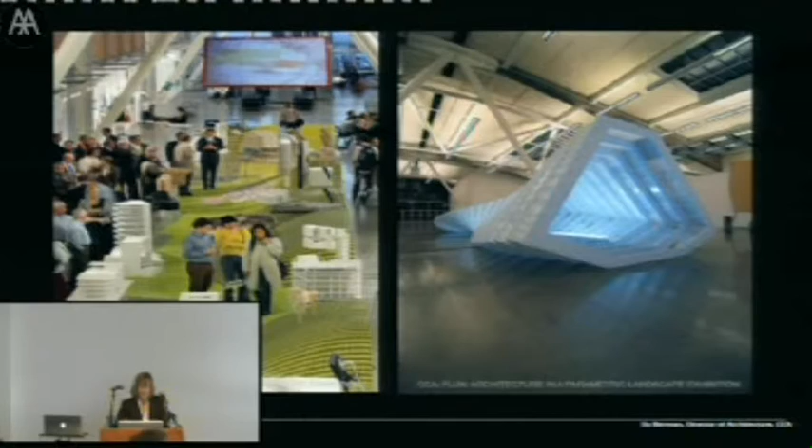Given the topic of this conference, I'm going to present a sampling of CCA architecture that shows an overview of work in the realm of digital design technologies and related practices that cuts across our research and design labs and their workshops, our lectures, exhibitions, and installations, our digital media coursework embedded within our professional and post-professional curricula, and also related CCA faculty, research, and design.

In many ways, this reflects my own attitude about both the curation of research and innovation within the realm of academia, especially within the context of professional schools of architecture, and the multiple intersecting networks through which it might be developed.

Architecture within the academic environment has always embodied a double-sided agenda, defined on one side by the need to produce a generation of practitioners who will become professionally competent as architects, and on the other side, the objectives of the academy, whose role it is to produce new forms of knowledge, and through this process to advance the architectural discipline through performative trajectory supporting advanced research.

Historically, the separation of the academy from industry was to ensure that the forms of research being developed were intellectually protected and not being controlled or compromised by the demands of the commercial market or predefined by pre-existing professional norms, but instead were at the service of other aspirations.

Upon my arrival as the Director of Architecture at CCA in 2008, I initiated three R&D labs focused on urbanism, ecology, and advanced digital and interactive technologies.

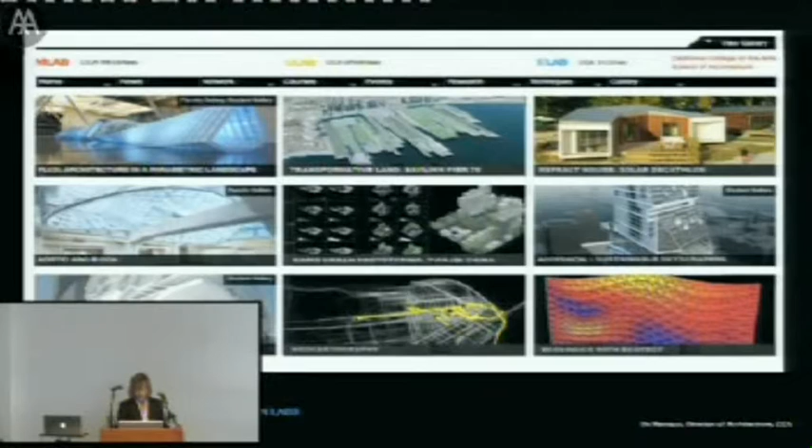It was also a way to collectively focus on or curate cohesive topics of exploration that were not necessarily defined as degree programs, yet could link up with curricular streams within these.

The Media Lab at CCA supports students, faculty, and local professionals in the use, experimentation, and development of advanced digital design technologies and strategies in architectural production.

One of the largest transformations in future architectural practice will be in the realms of rapid prototyping, digital fabrication, robotics, parametrics, computation and scripting, building information modeling, as well as the many models for visualizing information in many fields, including energy analysis, geographic information systems, among many others.

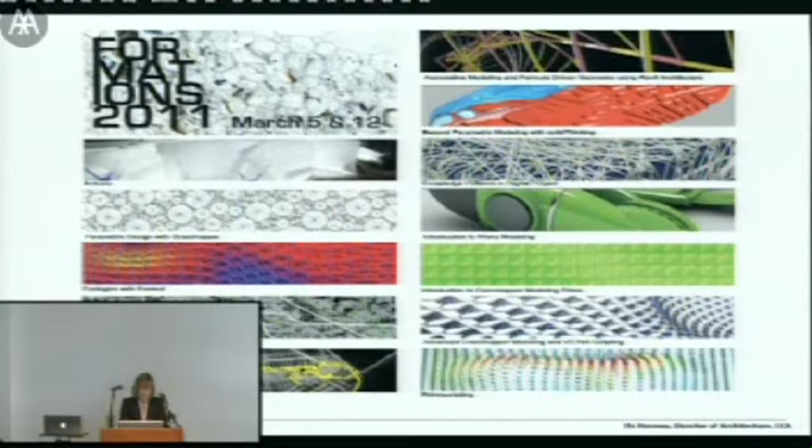The goal of MLab is to foster discussion primarily on these digitally based technologies and to advance innovation within the field, while simultaneously providing educational resources and information not only to the CCA community, but also to the architecture and design communities in the San Francisco Bay Area and beyond.

Through these labs, we run collaborative workshops that are structured around emerging research topics that are open to students, faculty, and also outside professionals.

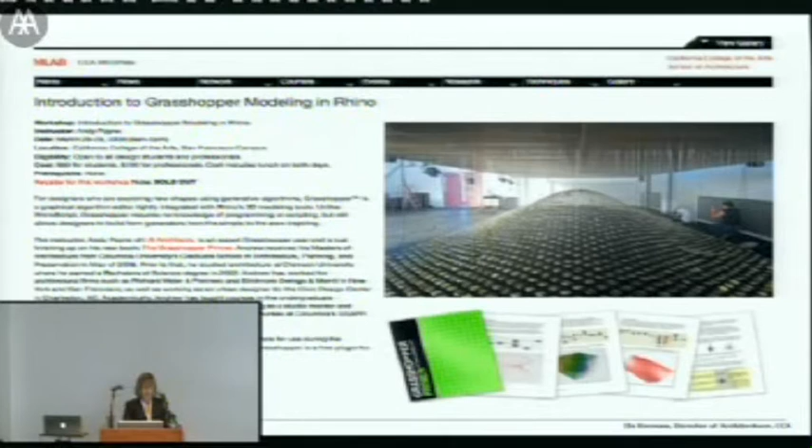Their intention is not only to augment the curriculum of the school through intensive sessions, generally one to two day sessions that aren't possible within the existing academic structure, but also, given the rapid pace of technological change, to provide an ongoing educational vehicle for faculty development as well as the ongoing education of outside professionals.

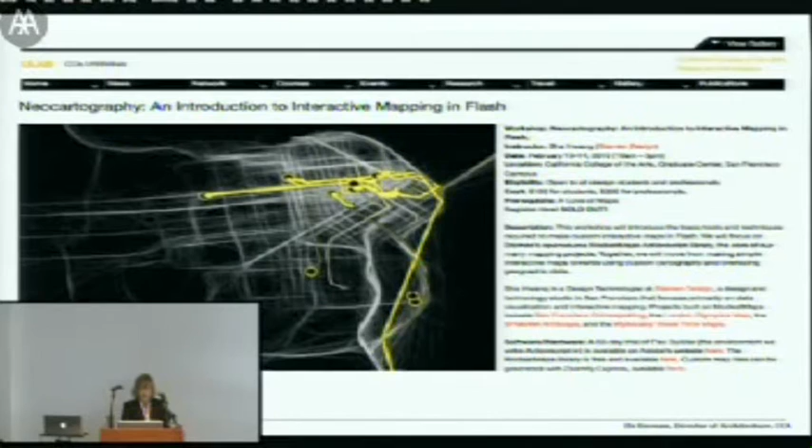These workshops are taught by CCA architecture faculty, by alums, and also a larger network of Bay Area professionals working within related industries. They also enable us to engage industry and media industry partners such as Autodesk in the instruction, sponsorship, and technology support for the workshops, and to potentially more directly influence developments in the industry.

We've also developed longer-term workshops such as the Biodynamic Structures 10-day workshop in collaboration with the Emergent Technologies and Design Group here at the AA, as part of the AA Visiting School program. This workshop - and this is our central nave space within CCA, the San Francisco campus...

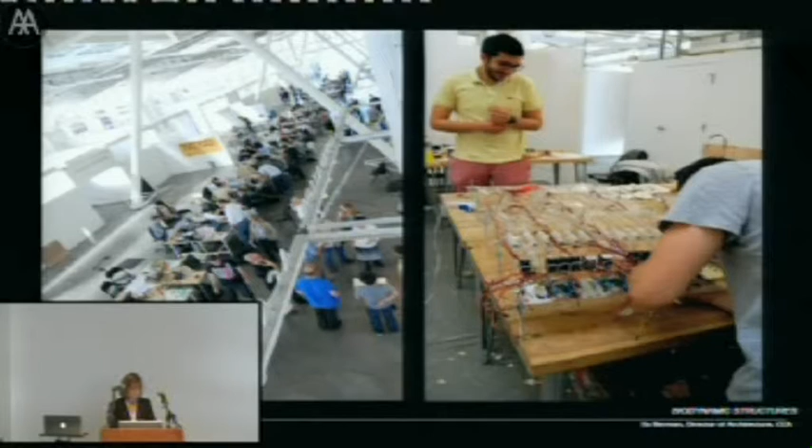This workshop involved 60 architects and designers from 20 different countries around the world. We've run it for the last two summers, and it's focused on interactive and responsive systems. Participants investigated biomimetic principles, extracting organizational, geometric, and structural logics to analyze, design, and fabricate prototypes responsive to electronic and environmental stimuli.

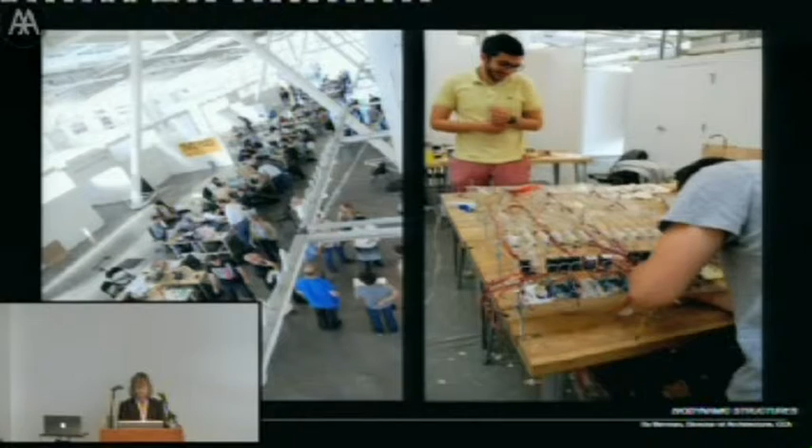Advanced analysis, simulation, modeling, and fabrication tools were used to apply this information to the design of responsive architectural systems, and robotic sensors and actuators were used to activate the design of these material systems through working prototypes.

In the last two decades of architectural practice, new digital technologies have evolved from being representational tools invested in the depiction of existing models of architectural space to becoming performative machines that have radically transformed the ways in which we both conceive and configure space and material.

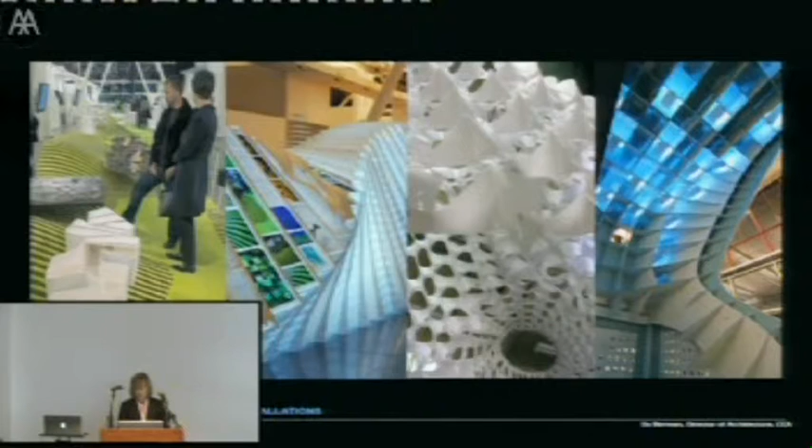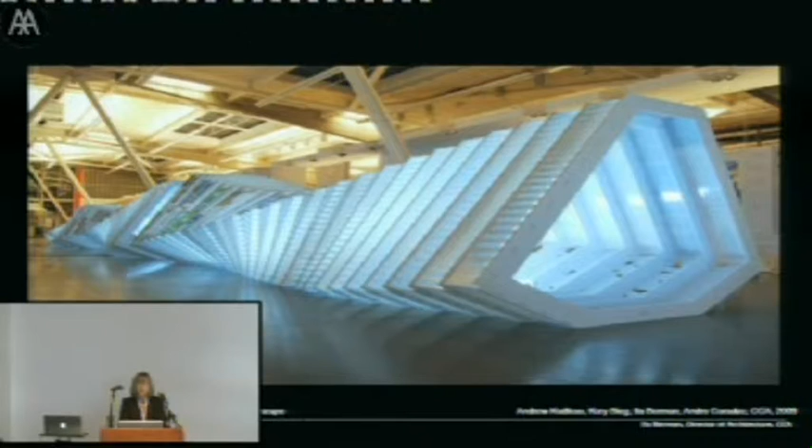These tools for design, simulation, and fabrication have enabled the emergence of new digital diagrams and parametric landscapes, often emulating genetic and iterative dynamic evolutionary processes that not only change the ways in which we integrate disparate types of information into the design process, but also significantly alter the methodological strategies we use for design, fabrication, and construction.

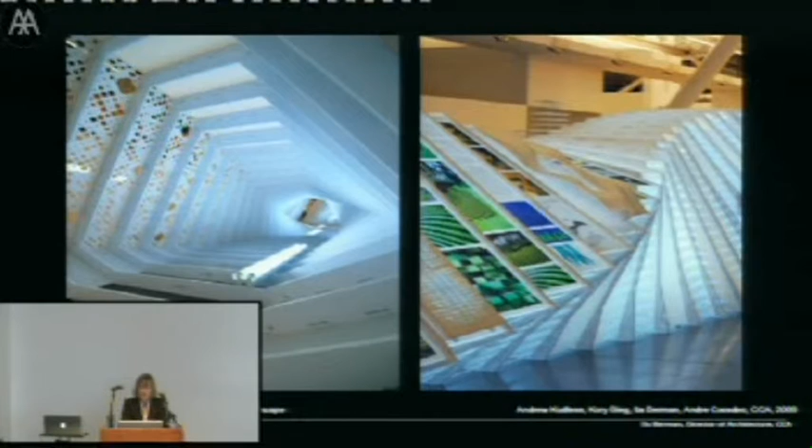After the early digital explosion of the 1990s, new forms of rigor and production have entered the field of architecture, supported by the emergence of parametric and building information modeling, and the enhanced use of computation and scripting, together representing the second critical wave of digital design practices.

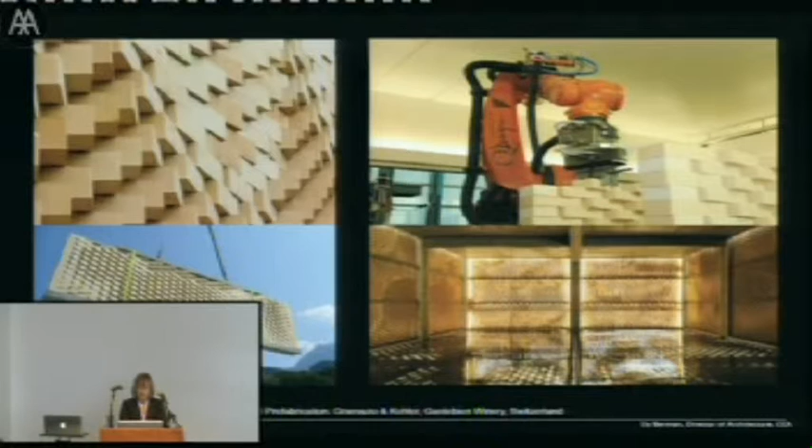Our current models of space are far more continuous, variant, and complex—cellular, woven, iterative, modulated—specifically as a result of the tools we use to produce them, an inevitable byproduct of the ever-expanding capacities of digital computation and related fabrication technologies, as these intersect with theoretical trajectories that long ago dismantled the social, functional, and technological truths of the early 20th century.

Typological stasis and structural closure are now supplanted by a topological model that permits infinite mutability and differentiation.

Flux: Architecture in a Parametric Landscape, was an exhibition we did a couple of years ago that focused on this emerging field of advanced digital design. It was generated in conjunction with the CCA Architecture Lecture Series, a series of digital workshops we ran, a number of CCA courses linked up with it, and the 2009 International Smart Geometry Conference held in San Francisco.

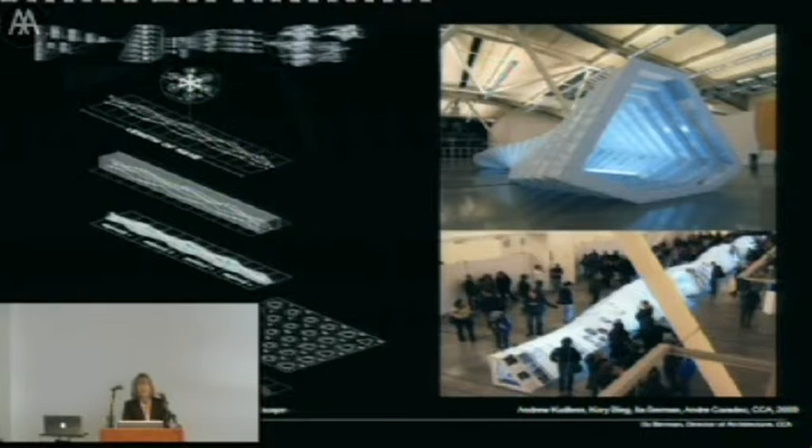The content of the exhibition is organized through a series of thematic taxonomies, each exploring a set of spatial logics that have been transformed through advanced digital practice. We looked at stacked aggregates, modular assemblages, pixelated fields, cellular clusters, seriality in its iterations, woven meshes, material systems, and emergent environments.

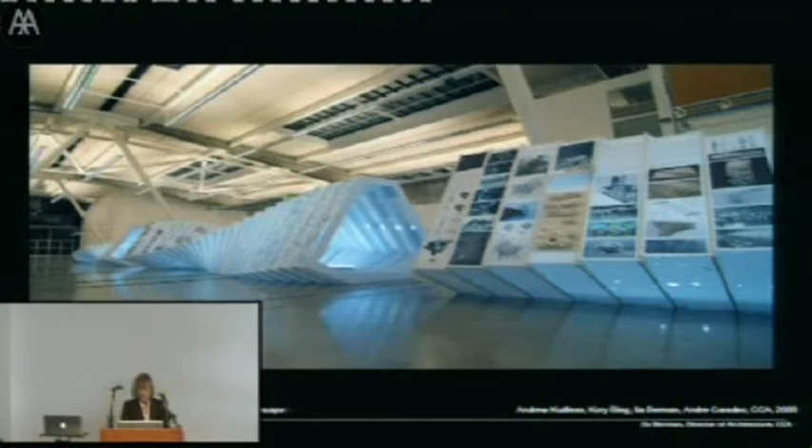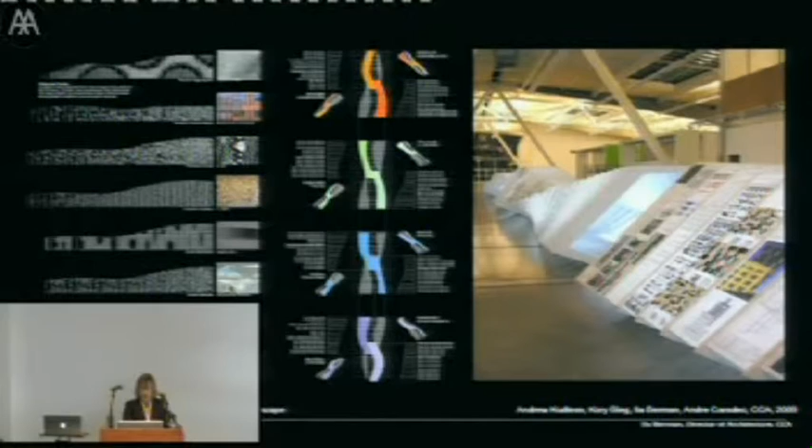In the exhibit, these themes were elaborated through the presentation of 50 built works and experimental architectural projects, bringing together the academic and professional environments, exposing an important trajectory occurring across the academy, the profession, and industry simultaneously. These were then expanded by a series of analytical diagrams and 3D printed models generated by CCA architecture students.

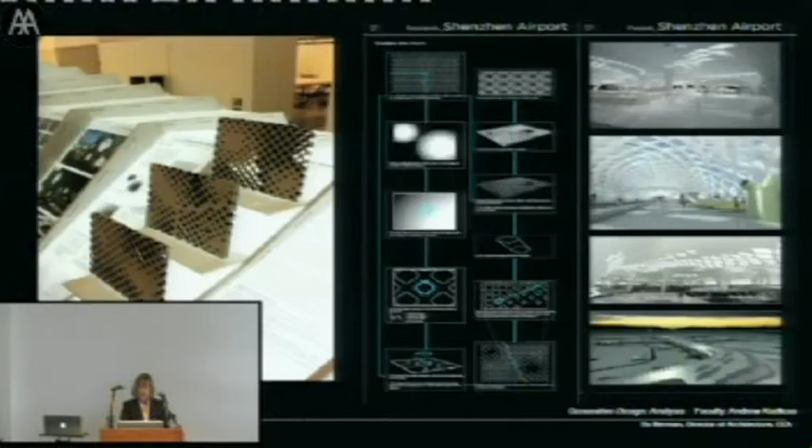The Flux installation itself was developed by a team of CCA faculty and students, also exploring the possibilities of parametric modeling and digital fabrication through the production of the exhibition armature, which was then overlaid with a didactic surface that supported the content of the exhibition.

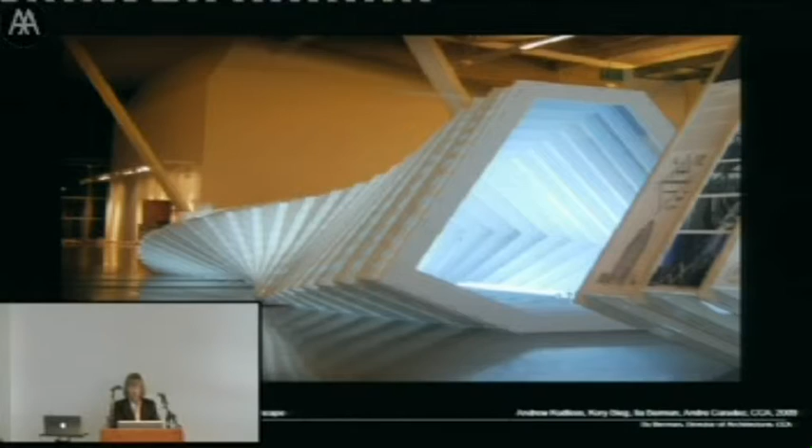The armature was designed using parametric modeling in a series of custom design scripts. From the thickness of the ribs to the overall twisting geometry and perforated skins, the spatial form of the armature was controlled through a complex set of relationships defined by its formal, performative, and fabrication constraints.

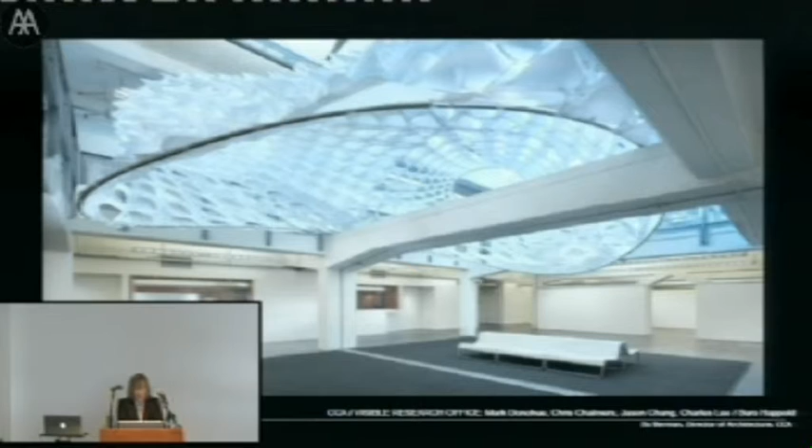A second project, a permanent installation on our San Francisco campus over a lounge in an existing two-story atrium, was called the Aortic Arc. This canopy was a light scoop and spatial definer topped by three portals that pull light in from above during the day and become a modulated surface when artificially lit at night.

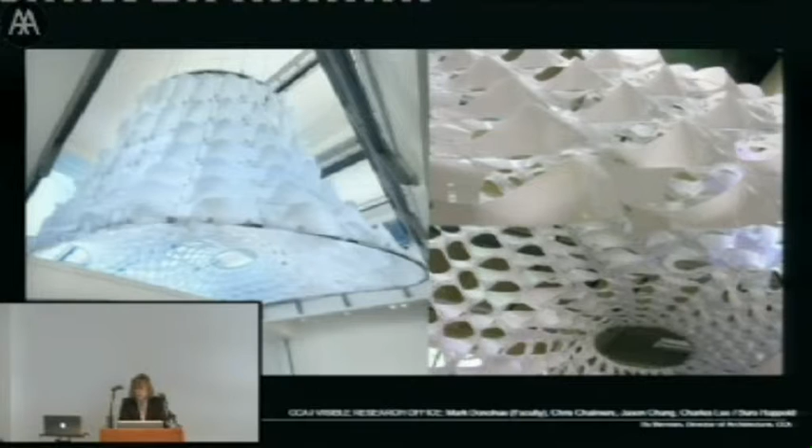The canopy had to be self-supporting and easy to construct and dismantle. It was a lightweight panelized system made from flexible plastic panels riveted together. This was developed by a group of CCA faculty and students working with engineering consultants from Buro Happold. The team developed the project using generative components in combination with CNC milled full-scale mock-ups to verify the fabrication technique.

In terms of an organizational process, we were linking up a working team in many of these projects of students, faculty, including alums, and also professional expertise from outside, as well as getting industry support in terms of both knowledge and material—this was an important juncture for us in moving some of these projects forward.

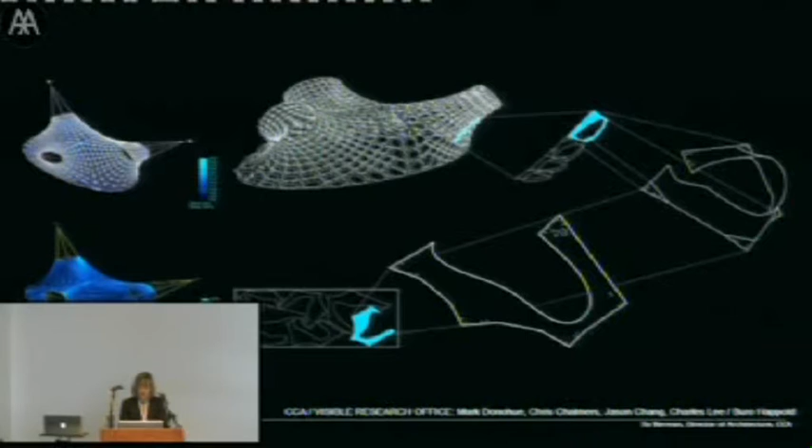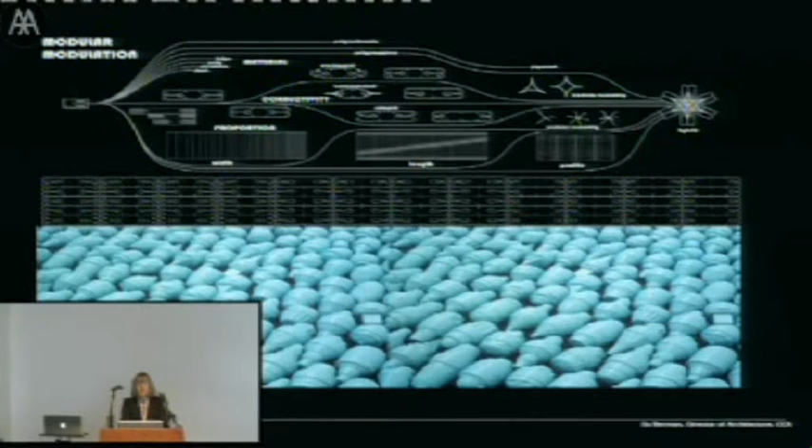Flexible computer-controlled automation and the potential for mass-customized architectural components will certainly transform building practice. Although these have been emerging within academia, where research continues to grow, the continued development of this almost demands an integration of the academy, industry, and the profession to support these larger endeavors. We should also be looking to other disciplines who have for many years integrated research, industry, and professional education in advance of architecture.

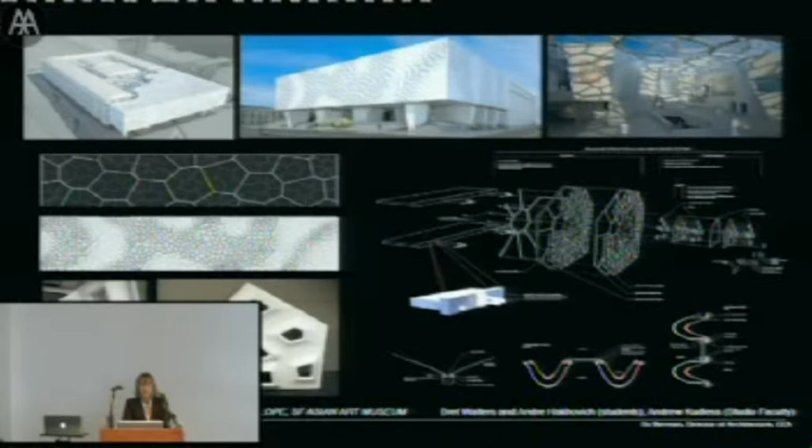The studio project focused on the renovation and transformation of the Asian Art Museum in San Francisco, for example, was partnered with Kreysler and Associates, a firm and industry company that deals with composites and fiberglass, and Front Inc., a facade engineering consultant, to specifically develop strategies for prototyping composite building skins by generating facade panels using parametric modeling and digital fabrication technologies.

In this process, students worked in Kreysler's facilities, fabricating full-scale fiberglass and composite prototypes to test the process of fabrication. The industry itself helped us by educating the students in the material processes and worked with us collaboratively throughout the entire process.

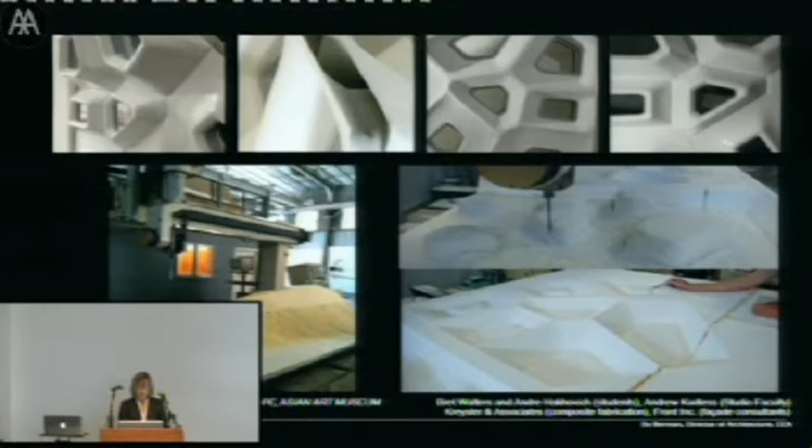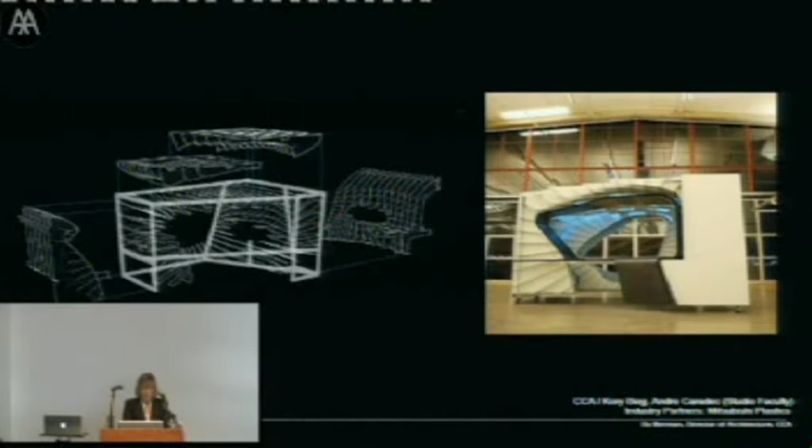In design build prototyping projects such as RapidType, which was a mobile prefabricated coffee pod, the link with industry was also critical. This was a CCA Advanced Studio project made possible by a material donation of Alpolic, a unique aluminum composite material manufactured by Mitsubishi Plastics. The intention was to develop a design strategy investigating the potential use of the composite material.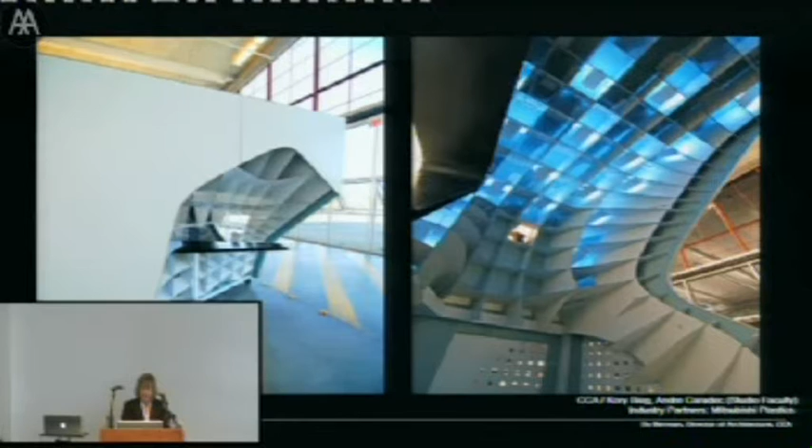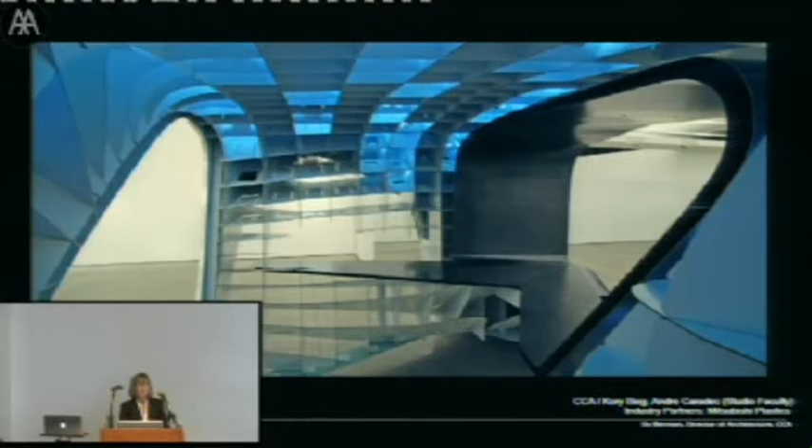In this case, we were actually approached by industry to explore potentials for the material product itself, employing CNC fabrication technology while aiming to bring higher end design to the prefabricated mobile food cart, a programmatic type that has been expanding rapidly in the San Francisco Bay Area. Taco trucks seem to abound, so we thought we would design our own potential mobile cart.

Within the context of our digital technologies and related curricula, there are four primary areas we are focusing on: parametric design and scripting, digital fabrication, advanced visualization, and robotics and interactive technologies.

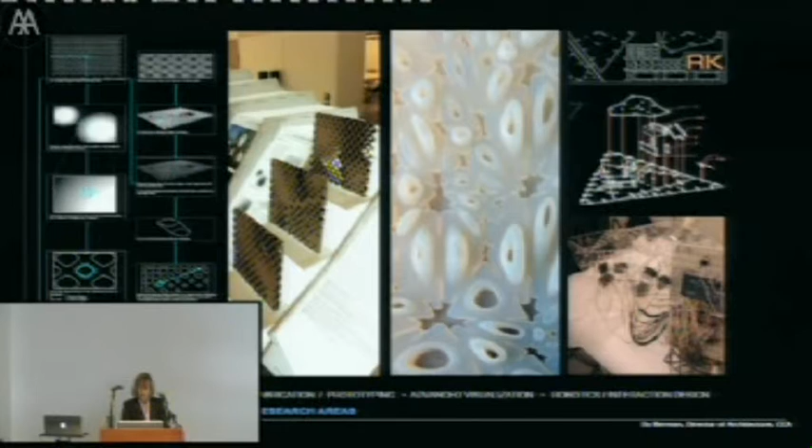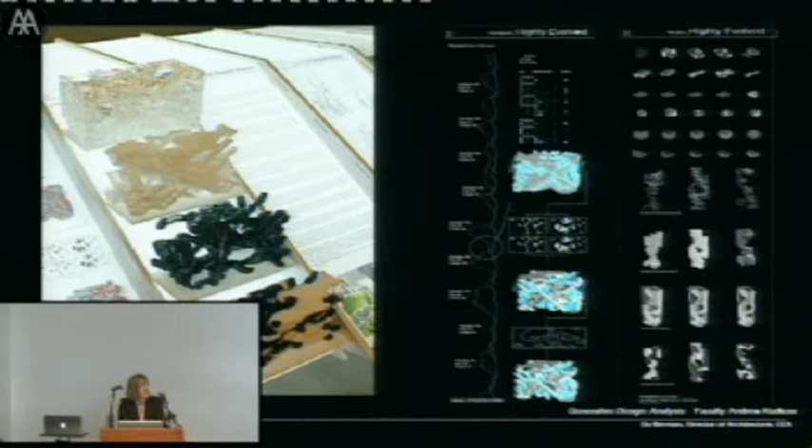Parametric design and scripting involve courses such as generative design that explore computational strategies for both architectural analysis and design, reconceiving form-generating strategies. New computational tools and programmatic code emulate iterative, dynamic, evolutionary processes where architecture now emerges almost as a genetically driven organism, enabling new spatial typologies dependent on simulation of generative patterns of form growth and development.

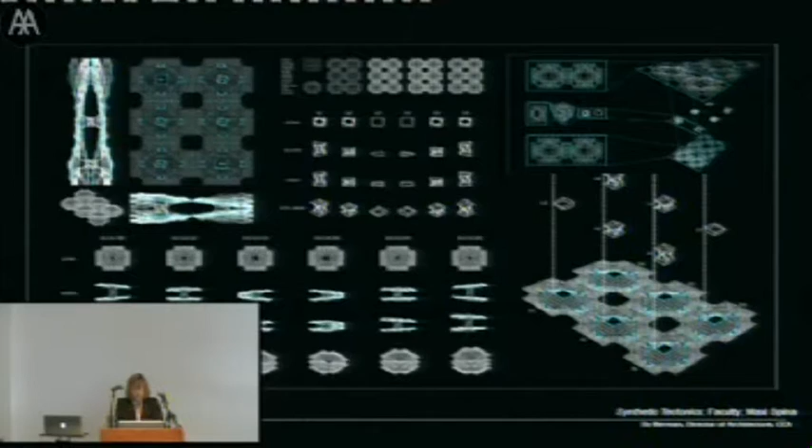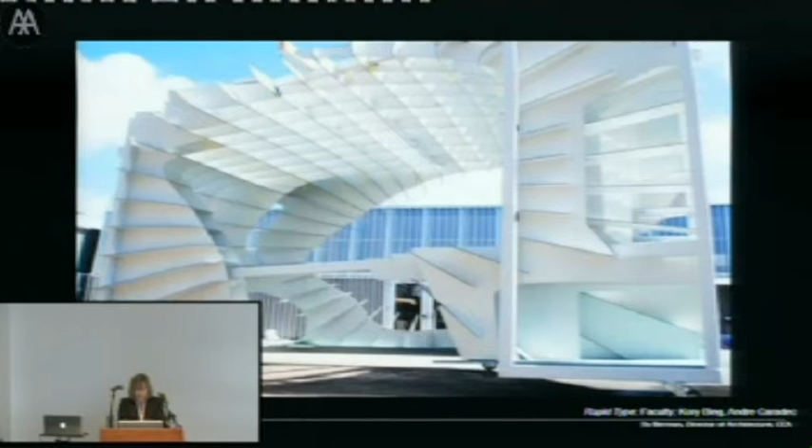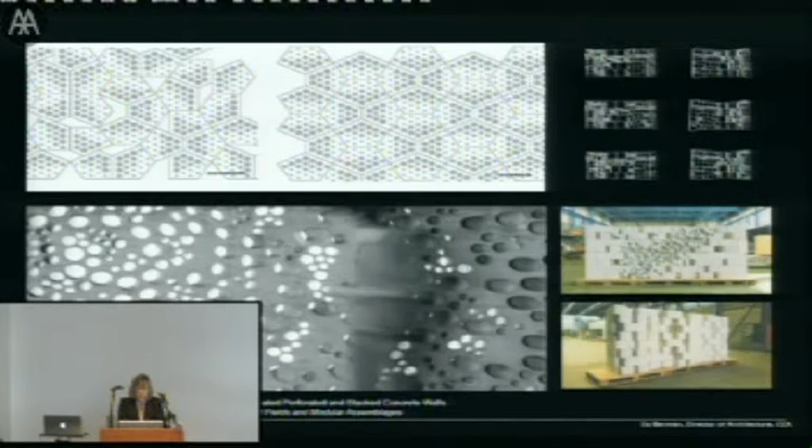Digital fabrication, which involves courses such as synthetic tectonics and studios such as Rapid Type, specifically focuses on the use of rapid prototyping technologies such as laser cutting, CNC milling, and 3D printing. Innovations in this area, such as linking programming to robotic production, enable a complex and infinitely variable plasticity in construction generated with incredible speed and precision.

Prototyping processes such as 3D printing are also now being tested with multiple materials for full-scale objects, enabling a compression in the design process as we move directly from design to fabrication.

Experiments in multiple media, such as a studio we're running this spring focused on digital mold making, prototyping, and ceramic casting, expand this terrain. CCA, because it originally was CCAC, where the last C, which stood for crafts, was dropped, we have wood, metal, glass, and ceramics that is part of the long history of CCA that I'm now embarking on trying to link up with architecture in more contemporary ways.

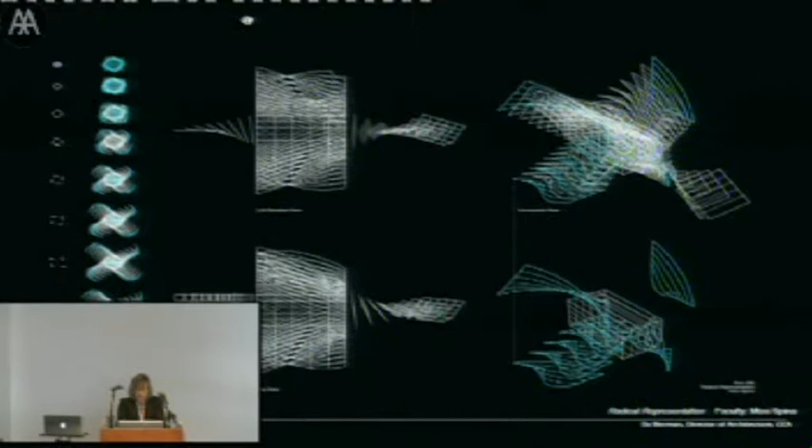Advanced visualization focuses on expanding visual techniques in the radical representation of form and space, as well as in the mapping and diagramming of information.

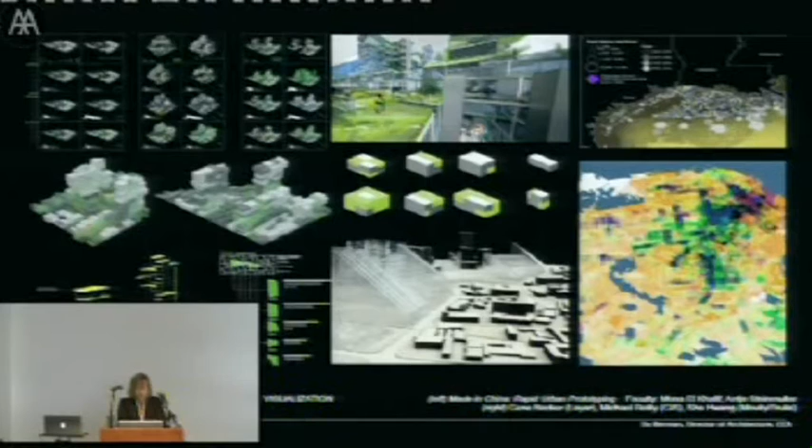The linking of data to form enables us not only to increase our capacity to transpose and spatialize information, extending our research capacity through the production of digital diagrams and datascapes, but also ensures that the 2- and 3-dimensional visualization techniques we're using for both design and communication now have an embodied intelligence, which I think is one of the largest changes that have happened with data-based visualization programs.

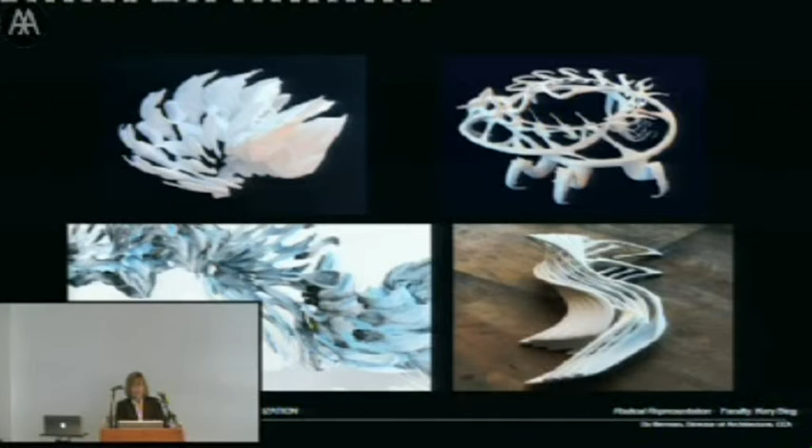Our ability to visualize complex iterations and multiple trajectories within a design process, or construct building information models linked to databases, is transforming our strategies for research, design, and communication. They also enable us to hypothesize in design and play out multiple potential iterations by thinking through it in a very different way.

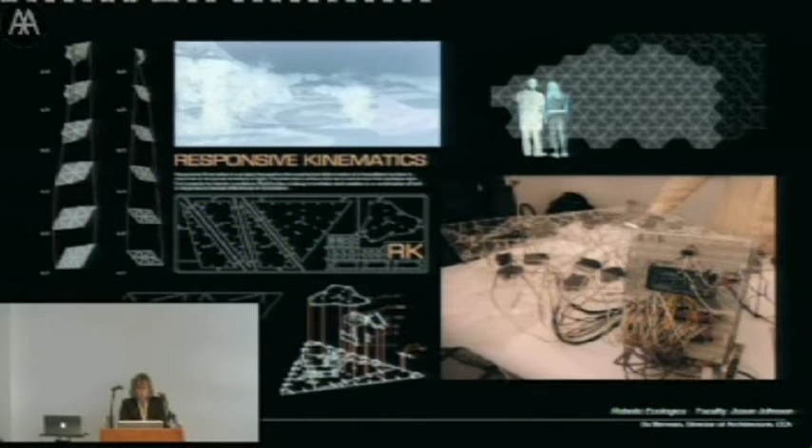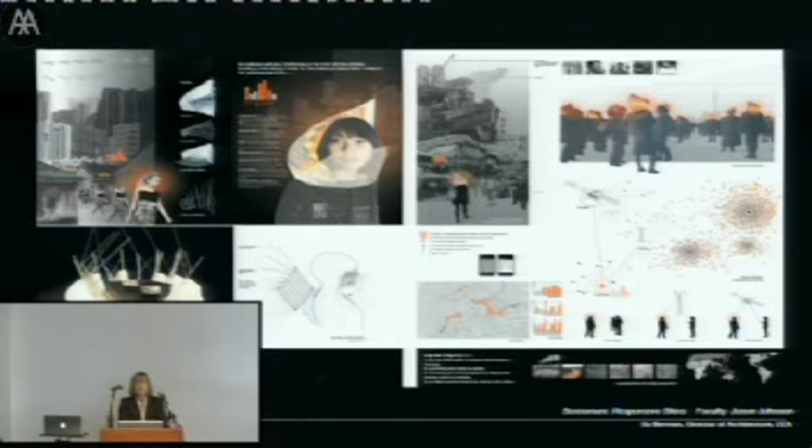The last area we're working in is smart materials, robotics, and interactive technologies that have also enabled the evolution of responsive environments operating in real time. Variable interactive skins, for example, that change in response to climate, light, and movement are indicative of a larger trajectory of future responsive interactive architectures that are, I would say, in direct opposition to the controlled universal environments of modernism, where strategies now for environmental response, filtration, and interaction are replacing the idea of environmental control.

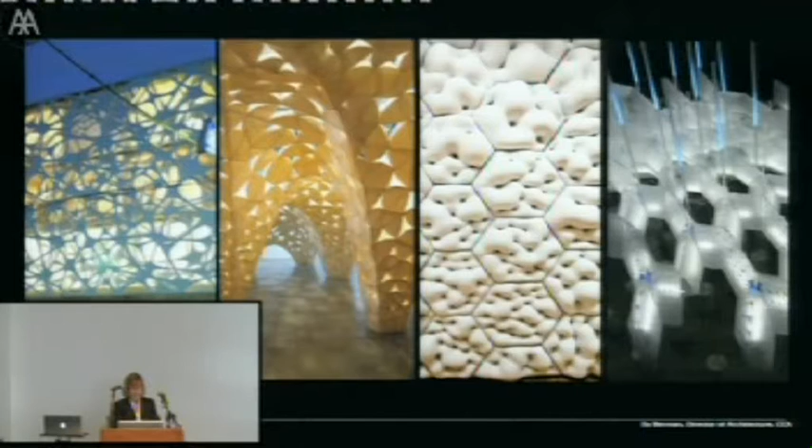These areas of research that I've described, part of our curriculum or embedded within our coursework, are also specifically linked with a range of CCA faculty expertise and professional research.

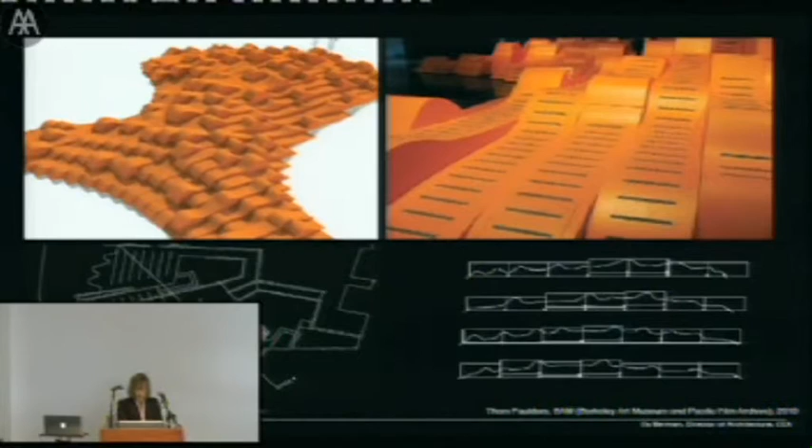Examples include the interior landscapes and program surfaces of Thom Faulders's BAMscape project for the Berkeley Art Museum, the OpSpace exhibition developed for the 01 San Jose Biennale by Mona El Khafif and Kory Bieg, and Thom Faulders's Airspace Tokyo facade project that suspends a screen of articulated voids constituting an open-celled meshwork that varies in density in response to the building's internal program, while also refracting sunlight, channeling rainwater, and buffering wind.

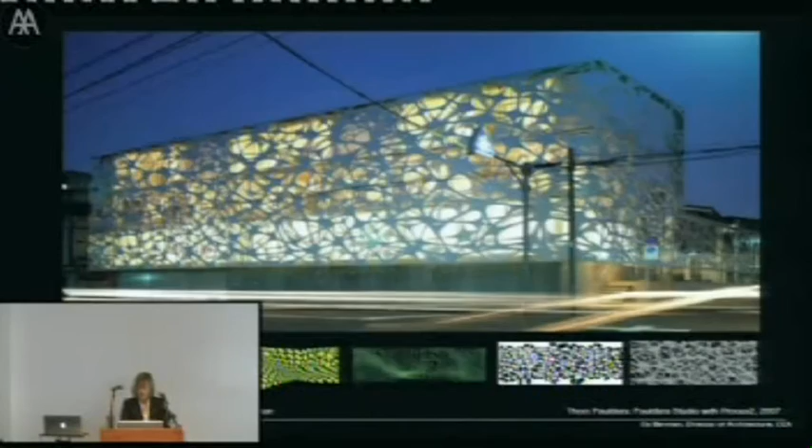In many of these projects, such as the Jellyfish House by Iwamoto Scott—Craig Scott is a member of our faculty—complexity is generated through the synthetic growth of an envelope or system which acts as a receptor, mediator, and index of internal and external forces. Often internal programmatic directives lead toward generative development and diversification of architectural form, while external environmental forces and constraints are ones with which this form interacts and to which it continuously adapts.

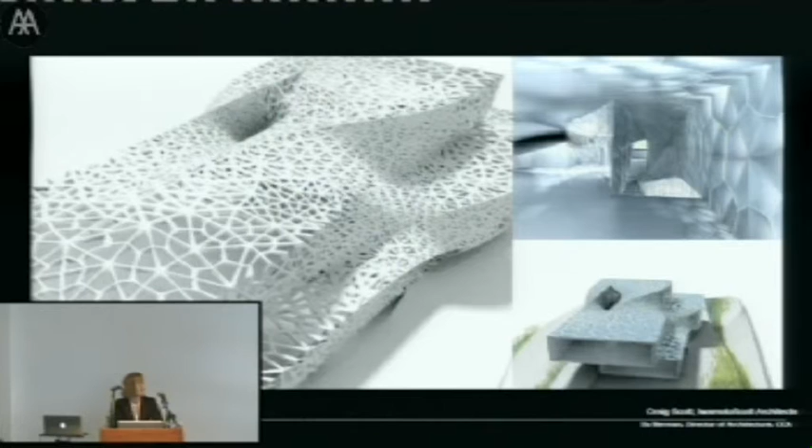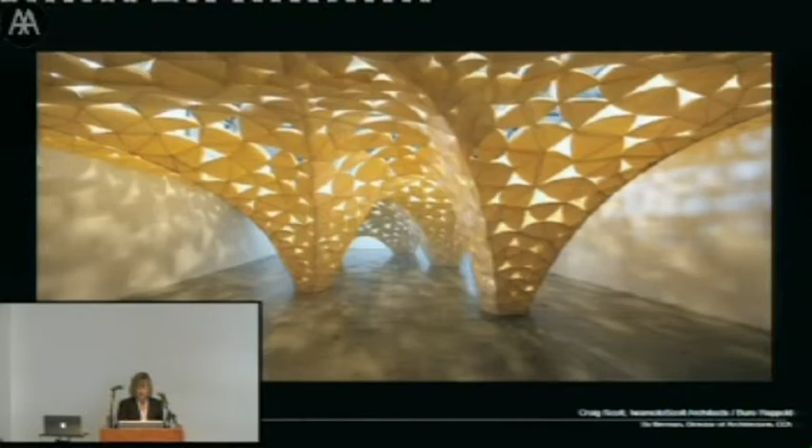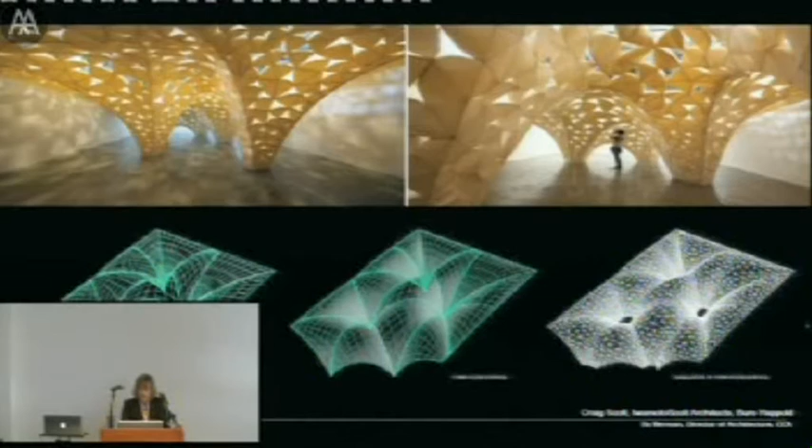These are processes themselves quite specific to digital technologies. Parametric design, scripting, and fabrication strategies are developed through many of these projects, such as the Voussoir Cloud project, also by Iwamoto Scott, which explores the structural paradigm of pure compression coupled with an ultralight weight material system. Here, a series of tessellated vaults are created based on packing a modulated cell system of folded petals made of very thin wood laminate.

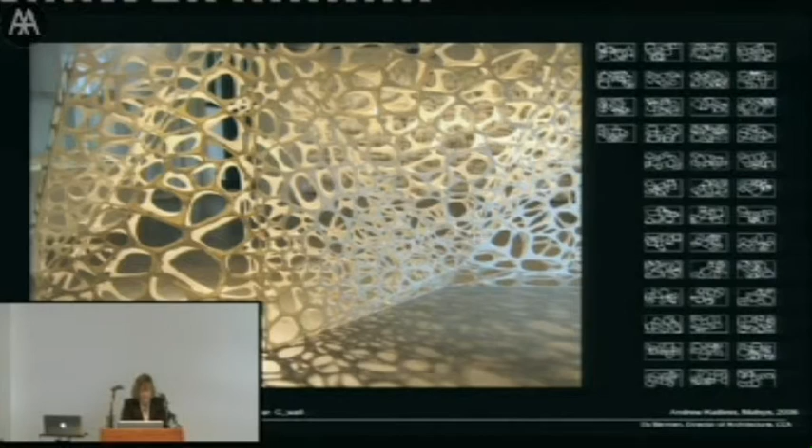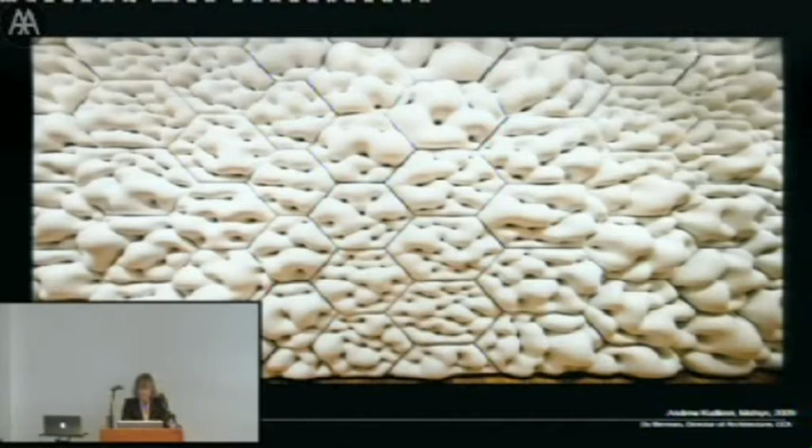Andrew Kudless, a graduate of the AA and a previous student of mine at Tulane University, who's also on our faculty, parametrically generated and digitally fabricated the C_wall project, and more recently his P-Wall installation at SF MoMA, now a permanent installation there. It employs scripting to generate a structural patterning of dowels across a hexagonal cellular system, linking computation with material explorations in the production of cast plaster panels that define a new interior skin for the museum.

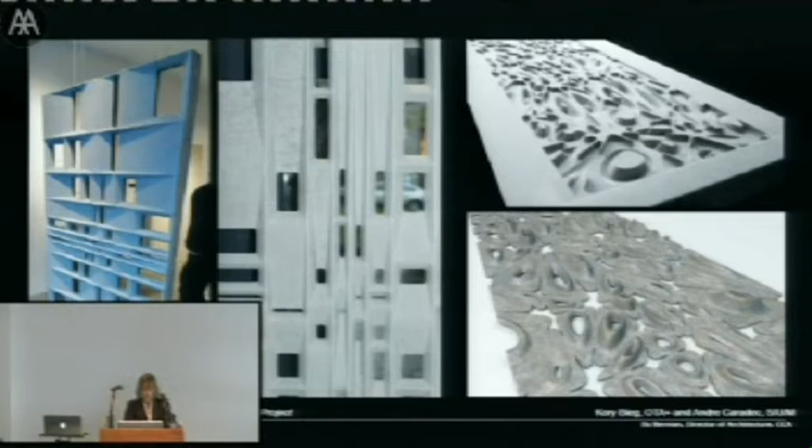Material experimentation with CNC milling and casting strategies have also been developed for work in concrete and silicone by Kory Bieg and Andre Caradec, in folded plastics for the interference screen and the wood pneumatic footing piece developed by my own studio, and the Bodywork series of installations.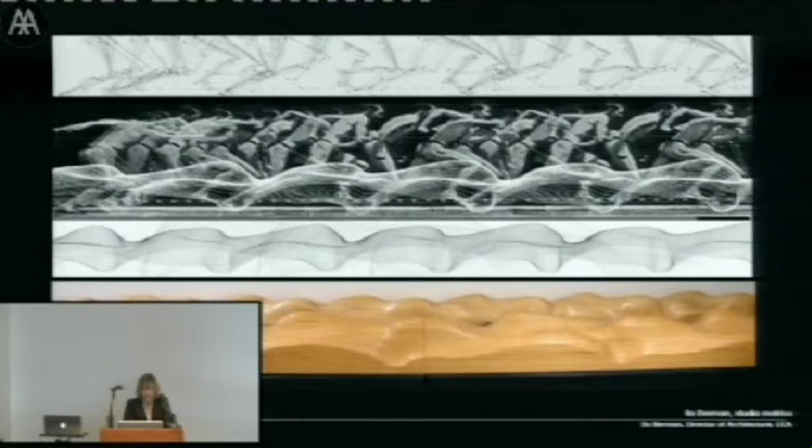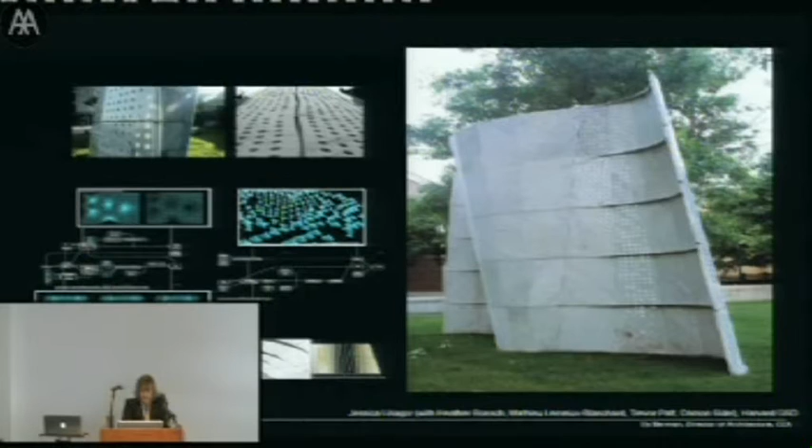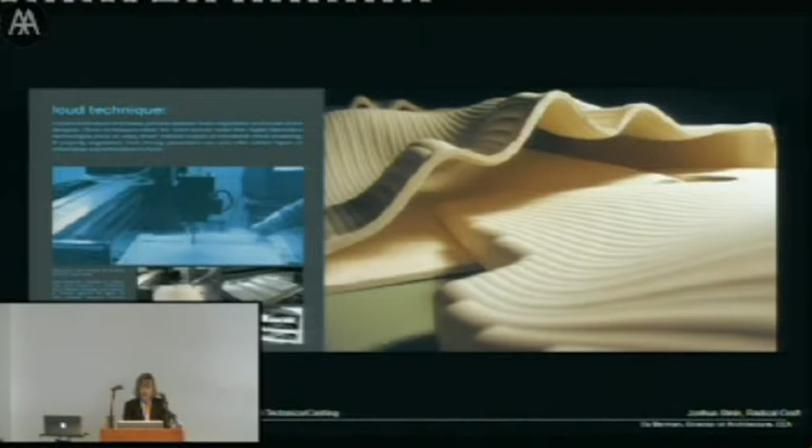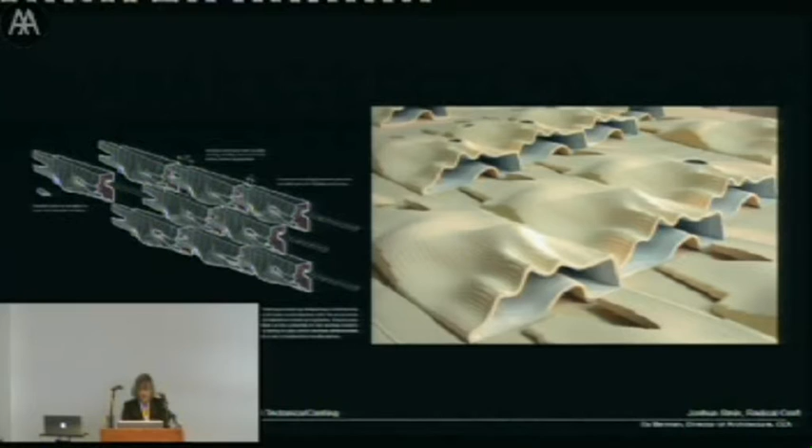The surfacing stone project was developed at the GSD, run by Jessica Lisagor, one of our faculty currently teaching digital fabrication, along with innovation and experimentation in digital mold making and ceramics casting by Joshua Stein of Radical Craft in his Tectonic Horizon series. In this project, an interlocking system of slip cast ceramic, parametrically developed modules, takes advantage of the texture created by the machining process and creates a family of casts differentiated through post-processing modifications.

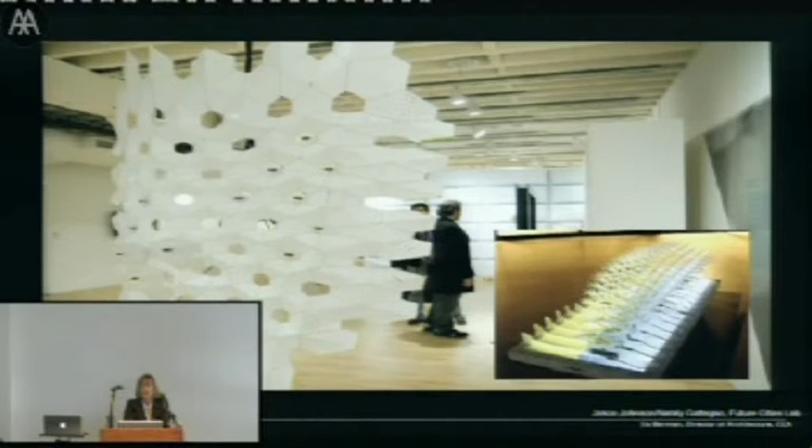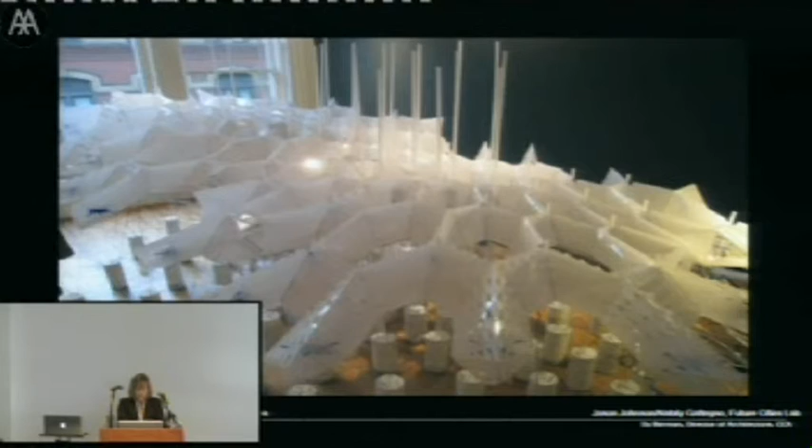Robotics and responsive, interactive environments are the subjects of exploration in a number of projects by Future Cities Lab, run by CCA faculty Jason Johnson and Nataly Gattegno. These include the Xeromax interactive prototype for a responsive second skin developed for the biodiversity exhibition, and the Aurora project installed at the Van Alen Institute, an interactive spatial mapping of shifting territorial resources in the Arctic that translates the shifting dimensions of the Arctic ice field into an immersive system of flickering auroras and responsive luminescent skins. It's an interactive piece that we could say is a form of 3D mapping.

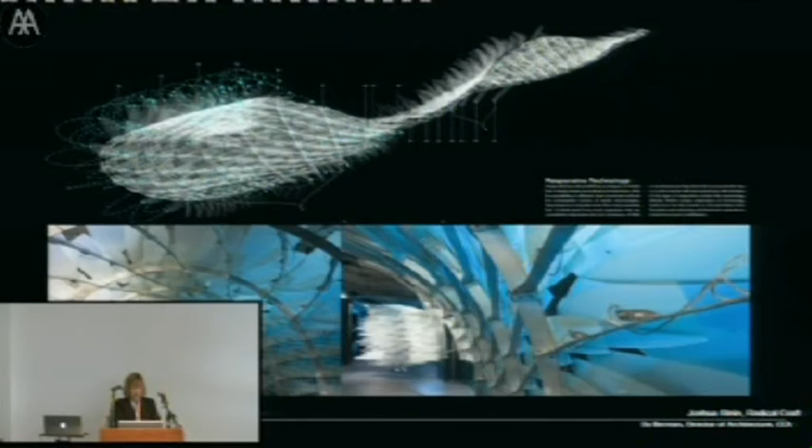Interactive environments was also the field of exploration of the Reef installation at the Storefront for Art and Architecture in New York, developed by Joshua Stein and Rob Ley, a project that tries to redefine the role of the architectural envelope by capitalizing on emerging material technologies such as shape memory alloys that might imbue space with behavioral qualities. These and other projects explore the potential of interactive embedded technologies that expand both the use value of designed objects as well as their atmospheric qualitative effects.

The microscale of miniaturized technologies enables them to be embedded, producing a new surface material intelligence, a sensate sensibility, with performative properties having applications that range from furniture, textiles, and interiors to enviro-responsive building skins.

These and many other projects represent the range of research trajectories we're collectively embarking on at CCA. The paradigm shift in technology can be seen to also indicate a necessary shift in the ways in which we're approaching education, that might operate through more expanded networks for research, implementation, and dissemination, and that would involve shifting the spatial and temporal increments of typical programs and coursework to allow for overlaps between education, the profession, and industry, and that might start to generate new models for working.

The concept that multiple constituents can be served by a single source is in some ways antithetical to the trajectories now evident in both practice and education, which are becoming more multivalent, complex, innovative, integrated, networked, and also decentralized. We should perhaps be looking to other models, software models, such as plugins, which characterizes our workshops. They become like little pieces of software that are injected into the curriculum, or post-industrial models such as mass customization.

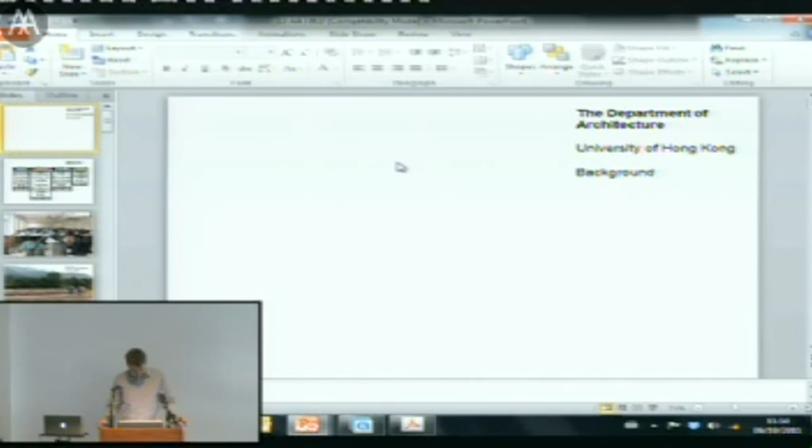Jonathan is acting head of the Department of Architecture at the University of Hong Kong. He's an American architect based in Hong Kong, where he's assistant professor and acting head of the department. He holds a Bachelor of Arts from Columbia University and a Master of Architecture and Certificate in Media and Modernity from Princeton University. He's a licensed architect and member of the American Institute of Architects.

Jonathan is a founding editor of 306090 Books, a journal of architecture, landscape, and urbanism that publishes its 14th volume, Making a Case, in 2011. And I think, actually, I have volume number 3.